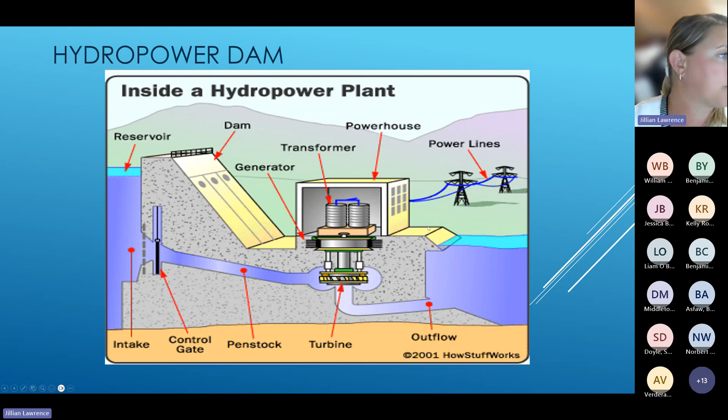I wanted to talk about the two types of means and materials we use in dam construction: the earthen dam, and concrete structures. I wanted to go over some basic terminology.

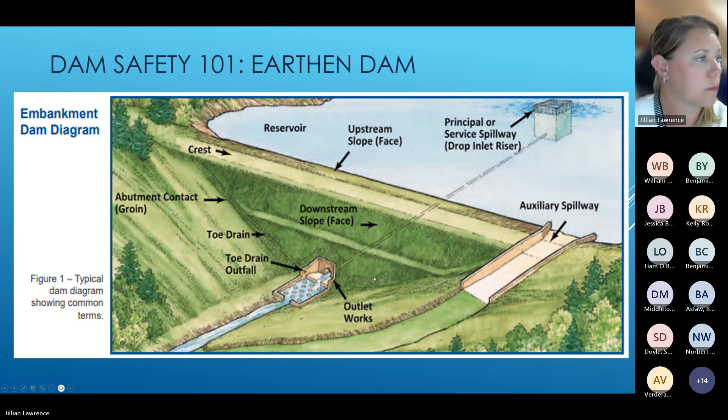The next slide shows us potential deficiencies with this type of construction.

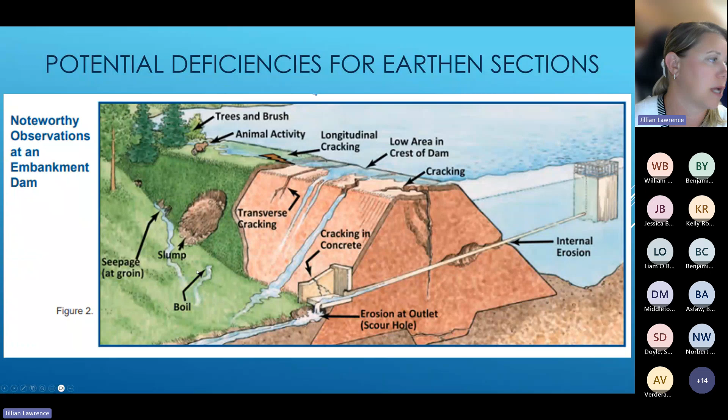For earthen embankments, we're always looking for the compaction and quality of the earthen section, and whether we see any slumping or low points that could be susceptible to overtopping during a flood event. We're looking for cracking, slumping of material, movement of materials, and either an increase or decrease in seepage, or a boil, which would indicate an internal erosion problem bringing materials from the embankment out and exposing them to daylight. Those are a few of the things we look at for an earthen dam.

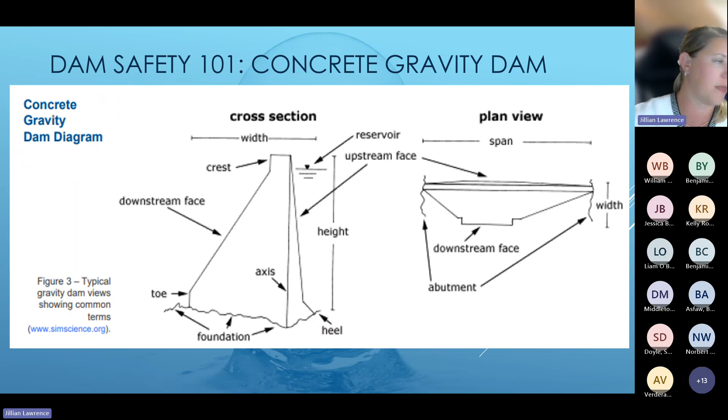For a concrete gravity dam, we have similar terminology with the upstream face and downstream face and crest sections, but a notable difference is that standing on top of the dam, looking downstream, we also introduce the heel and the toe, which is easy to remember if you think about standing on the crest of the dam looking down, in similar nomenclature to the way your foot is facing.

One of the main differences between a concrete gravity structure and an earthen dam is that with the concrete gravity dam, we rely on the weight of the concrete and reinforcement materials to resist the overturning and resistive forces from the head pond. Those are key elements to look for in a concrete gravity dam.

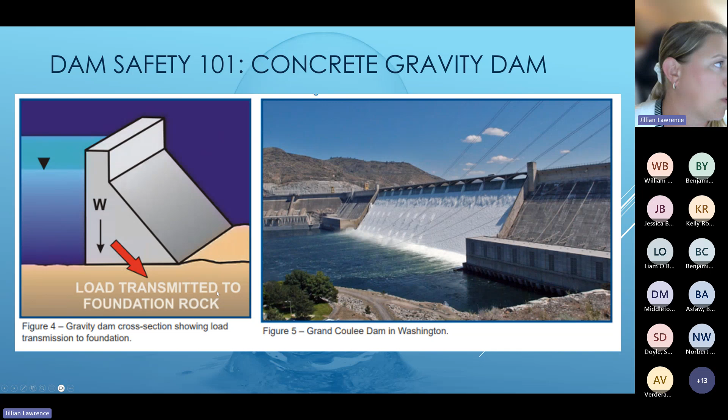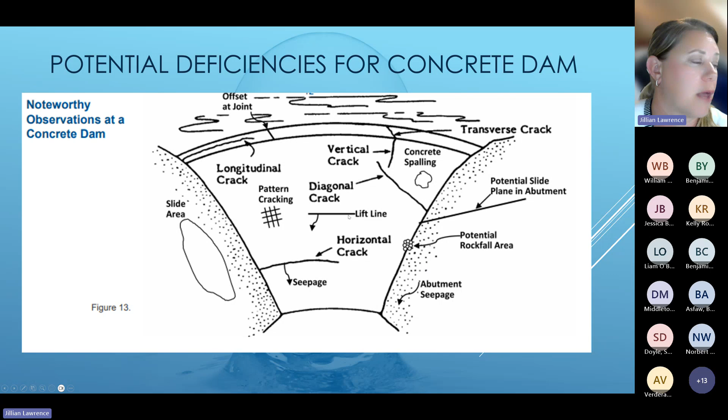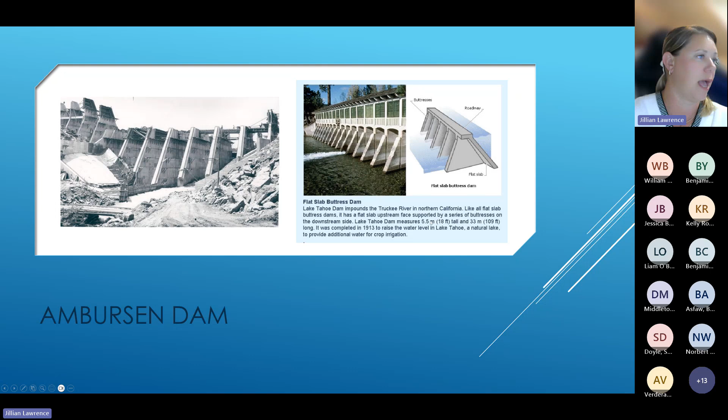Another example of a concrete structure that looks very different in its design and shape is the Ambursen Dam. The concept is very similar to the concrete structure, except it has this buttress and slab construction. This was a popular design because it came out of the need to reduce the amount of concrete. If you recall, we talked about the sheer mass of concrete resisting the water load. This design was able to still resist the water load using much less concrete, but the same mechanism of transferring the water forces to the foundation and the abutments and against the buttresses.

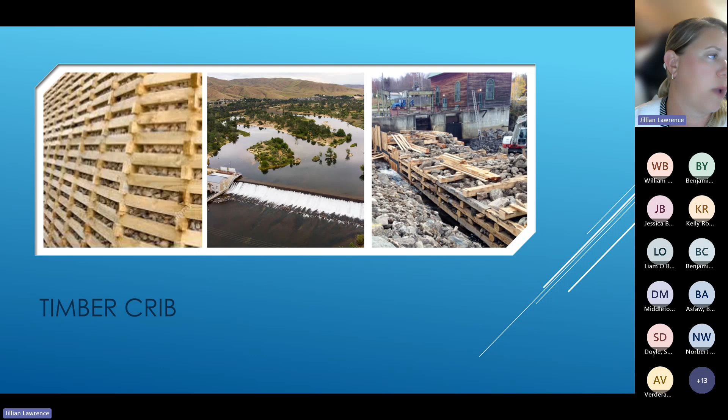I think this is the last dam construction we'll look at. This one is a timber crib structure. The basic design involves putting in wooden timber and filling the void spaces between the cross members with either ballast or rock fill. This picture is of a FERC-regulated dam in Boise, Idaho that was constructed in the early 1900s using this technique, and has since been overlaid with concrete reinforcement.

The reason I wanted to show some of those different construction materials of dams is because when we talk about the way dams fail and the condition of dams, the material and construction are critical pieces. So getting into a little bit of FERC dam safety leads us into the rest of the dam safety programs that we do as a regulated entity.

First and foremost, FERC looks at the hazard classification of a dam. That's an analytical study that hypothetically fails a dam using the worst case scenario, applying the probable maximum precipitation or other precipitation events to the drainage area, then failing the dam in the worst case scenario. Based upon that, we look downstream to see where the flood failure flows go, and we assess what risk it poses to the downstream area.

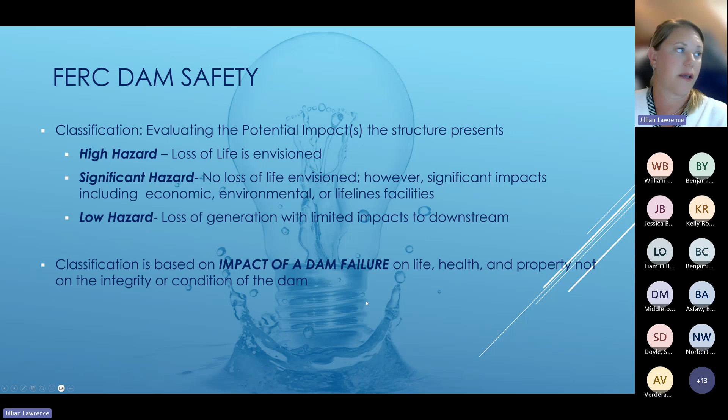So we don't envision the flood flows really leaving the banks or significantly impacting any roadways, any homes, any businesses, those kinds of potential impacts that could occur. The reason that we look at the impact of the failure is because once we know the hazard classification,

it helps guide our dam safety monitoring. As you can see, we have several different types of documents that we prepare for each facility, specific to how we're going to monitor it. For example, the STID, the supporting technical information document, really gives us the history of the structure.

It goes through the potential failure modes that we'll talk more about in the next few slides. It goes through drawings, construction, operation, site geology, stability, and hydrology and hydraulics. So basically it gives us information on the dam as it relates to how it might perform

under a flooding event, under an earthquake event, and general operations. The DSSMP is built out of the failure mode analysis. It tells us how we're going to perform surveillance and monitoring of the structure, what key things we need to look out for, and what things we need to implement instrumentation-wise to monitor for.

The DSSMR is a snapshot of one year. I equate it to kind of your health and wellness checkup visit with your doctor, to see how you're performing. And the potential failure mode analysis is all the ways and vulnerabilities, based on the type of dam that you have and its auxiliary features, that you could fail the dam, or how it could fail or misoperate or perform or become damaged.

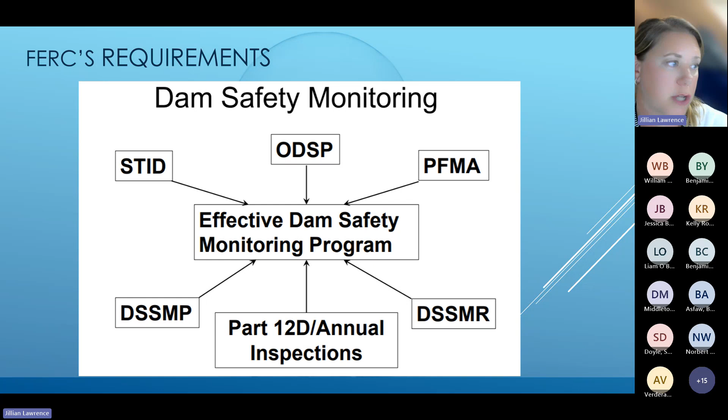So really what this slide is saying is that to have an effective dam safety program, you really need to have all of these elements in conjunction and reflecting upon each other, so that you have a comprehensive program. And so I talked a little bit about the failure modes. We'll go over them in a little bit more depth, but basically dam safety is really about the observation and analytical data that you get on the performance of your dam.

And the way that we go about identifying ways to perform this surveillance is by identifying any known vulnerabilities or potential failure modes. I showed that earlier slide about some of the differences between an earthen structure and a concrete structure, because while there were some similarities, there were some key differences that we look at.

And so when we go to do a potential failure mode analysis, what we're looking at is an initiator. What event needs to occur for failure of the dam? It could be flood related, it could be earthquake related, it could be deterioration or aging of the structure, human error, misoperation, or malfunction. But that alone doesn't cause a dam to fail. What we need is the failure mechanism — how does it progress, and what's the step-by-step progression of it?

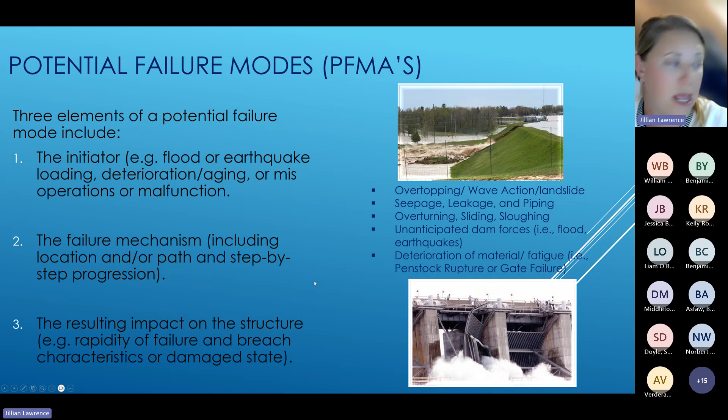So you have a flooding event, you have an earthen dam, the flood rises up to a low point on the crest and it begins to overtop. Now not only do you have the initiator of the flood, but you also have the failure mechanism, in that you have a low point in the crest, the flood raises up and begins to overtop, and then you have erosion of the earthen embankment. And then the resulting impact on the structure is that it progresses without any intervention and ultimately ends up as a failure of the dam.

And so why those failure modes are important: when you build your dam safety monitoring plan, you want to include those failure modes in there in some manner. What you want to do is focus, whether it's your dam safety staff or your hydropower staff or both, their eyes and their visual observation of the structure on the failure modes that are most likely to happen and have the largest consequences, so that they know exactly what to look for.

And so the dam safety monitoring plan really comes out of the failure mode — it's developed off the basis of the failure mode. And then it includes some of the failure modes: how will we know if this failure mode is likely to initiate or start? Well, we can install piezometers if we're concerned about the phreatic surface throughout an embankment and we're worried about seepage at an earthen structure, or weirs if we're seeing a concentrated flow. We want to be able to monitor it so that we quantifiably know whether we're seeing a change in that flow. If we just use visual observation, it's very hard to tell, year after year, day after day, if you're seeing a change.

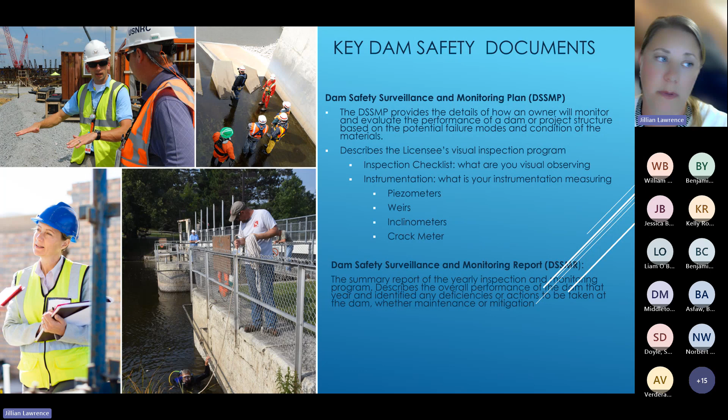It'll also have all of your data from your piezometers, your weirs, and your crack meters if they're installed at your facility. So with those two together, you have your plan of how you're going to observe and inspect your facility, and your report of what's actually happening, so you can look historically back and see how the asset's been performing over the years.

So we talked a little bit about the DSSMP and the DSSMR. We talked a little bit about the supporting technical information document, and the next document is the emergency action plan. You can have your supporting technical document, and your DSSMP and your DSSMR — those are all going to be how you're performing inspection.

But what happens when you have an event? Well, this is where the emergency action plan comes in. What it is, is a prepared document for high and significant hazard dams. It's a requirement for those dams.

You can certainly prepare an emergency action plan for a low hazard dam, even though the consequences of failure are not as significant as a high and significant hazard dam. But why it's important is that this EAP document really identifies...

First and foremost, what the potential failure modes could be at the dam, when to activate an emergency action plan, when you need to notify people that you're having an issue with your structure, and then it follows up with pre-planned actions that need to be followed by your operators and personnel, should you have a dam incident that warrants an EAP activation.

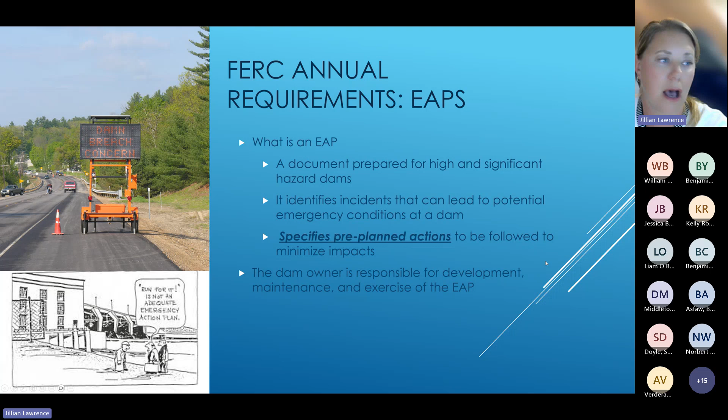The dam owner is the responsible party for the development of the EAP because they know their asset well — they've done all the studies for it. We maintain the EAP, we exercise the EAP, but we have a lot of involvement and review by some of our emergency management agencies and our downstream communities, so that they can best help us implement the emergency action plan should it need to be activated.

So what the emergency action plan is: once an incident has been identified at your structure — for example, you have an earthen embankment, and you've been monitoring seepage for a long period of time in accordance with your DSSMP, that's one of the areas you're surveilling — and you've gone out to the site, and now you're noticing it is no longer just seeping.

It's continuing to seep, but in addition to that, it's turning into a boil, which means the water is bringing material with it. So it looks like chocolate milk. It looks like it's erupting into a small volcano. You can see the interior sediment and soils from the embankment.

And so that change from just monitoring seepage to the actual bringing of material out would warrant an EAP activation. So what you would do is pull out your emergency action plan document, open it up to the notification flow chart, and make telephone calls. What that does is notify all of the stakeholders in your EAP that you are having an issue at your structure, and it puts them on notification.

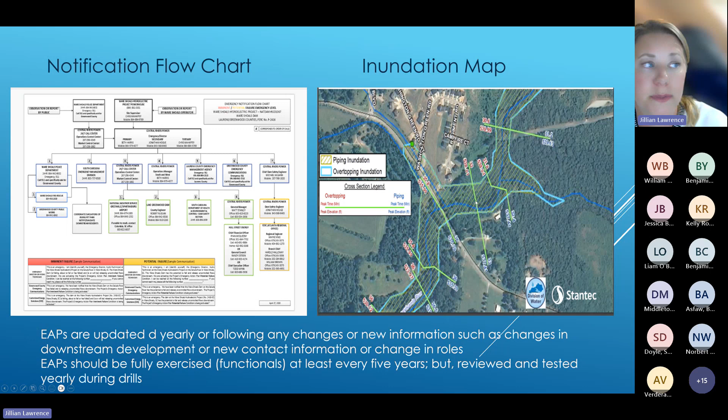Out of the EAP, the notification flow chart and the inundation map are really the key two documents. The notification flow chart tells you who you're going to call and what priority, and the inundation map gives a visual of the areas likely to have flooding impacts, and also gives good information on what those depths are and what the arrival times are. So all key and critical components when you are evacuating downstream.

The last document is the ODSP. This document is not just a site-specific document, not project-specific, but it is the owner's. So the company that can own one or several hydro facilities - it's really their commitment to dam safety, to their dam safety responsibilities, and it's not limited to inspection and operations, but it also means we acknowledge the responsibility of owning a dam. We allocate resources, including personnel and financial resources. It gives a clear designation of responsibility of who would enact EAPs, who's responsible for dam safety at your facility. And then, that you have clear and open communication throughout your organization about your dam safety practices and program.

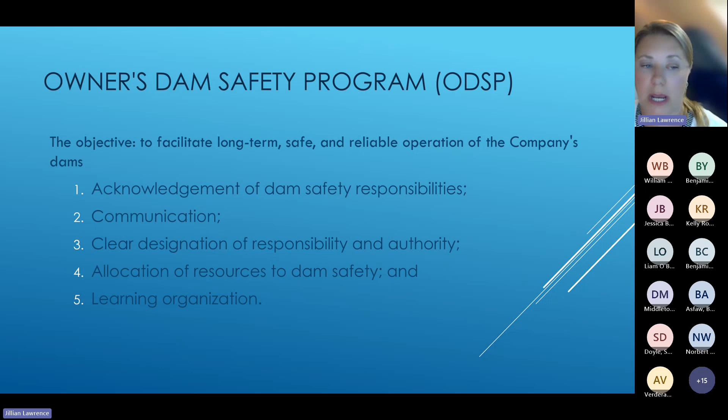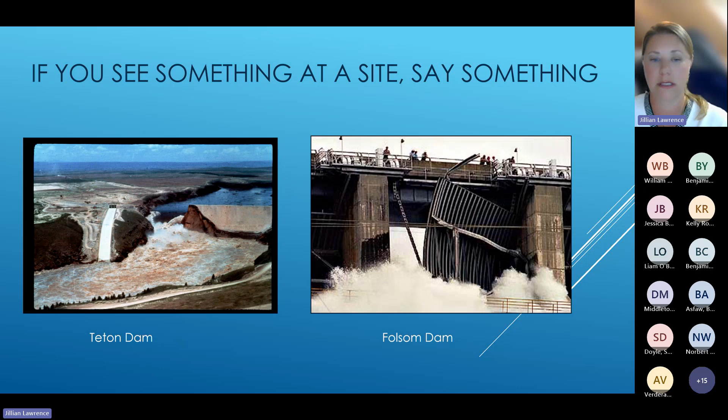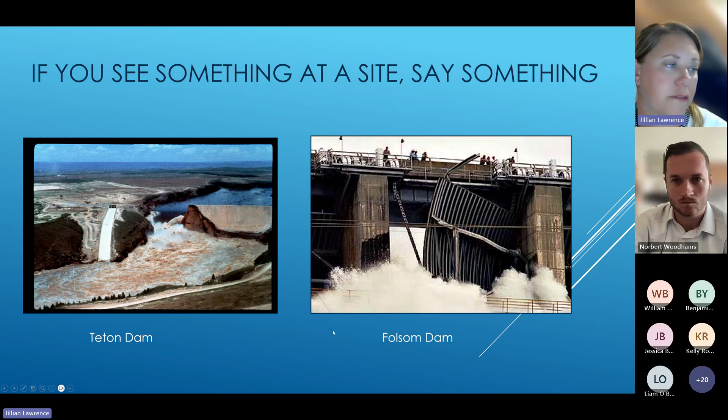And two, that it's a learning environment, because as in all things, we continue to learn. We learn through past failures. We learn through new technologies. We learn from each other. So what I usually say at our facilities is that if you see anything that looks amiss or not right, say something. In dam safety, it's all about visual observation, reading data and instrumentation, and looking for changes - whether you're seeing increases or decreases, any change is warranted to elevate it up to your dam safety team and engineering team, a third party for investigation.

And basically, I think that's it. I have some additional resources if you're interested. This was super quick.

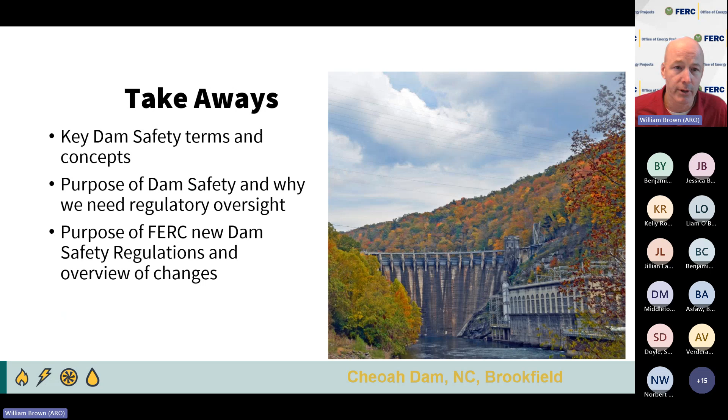All right, so I'm going to talk about dam safety and FERC's programs. I appreciate this opportunity to come and talk to your committee today and share my perspective on dam safety. The takeaways - I'm going to focus on these second two items because Jillian's covered the key dam safety terms and concepts. I'm going to talk about the purpose of dam safety and why we need regulatory oversight, as well as some changes to our regulations.

So we've covered most of the vocabulary in Jillian's presentation, but I'm going to talk about a couple of items here as they apply to our new regulations. We do these independent consultant inspections, called Part 12D inspections. We require them for our licensees every 5 years on high hazard dams or dams that are large - either having large reservoirs or above a certain height.

These independent consultants are experts on dam safety. They come in, look at the project, and then make recommendations to the owner on the safety of the project and things that could be improved. With our new regulations, we've introduced some new terms.

One is called the periodic inspection, and the other is comprehensive assessment. I'll talk about those more later, but I want to familiarize you with the terms. The periodic inspection is just kind of a visual inspection, a smaller effort compared to the comprehensive assessment, which is a lot more work. It includes the PFMA that Jillian mentioned, along with what we're calling a level 2 risk analysis, which puts numbers to those failure modes you identify, estimating the likelihood of it occurring and then joining that with the consequence of the failure.

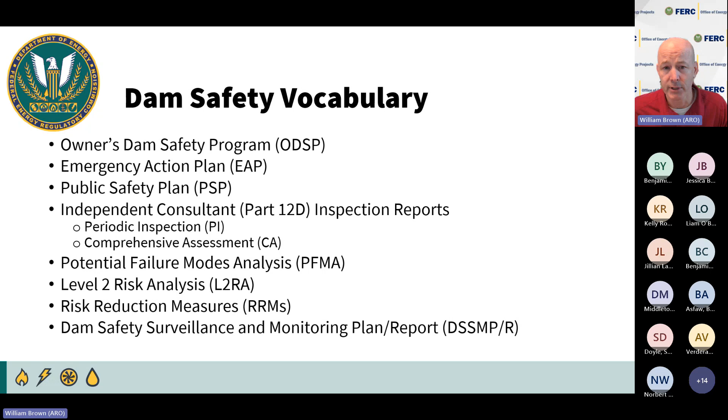Once that analysis is done, we use that information to look at ways we can reduce risk. So common terminology you'll hear is risk reduction measures, and it can refer to a lot of things. It could be like an interim or emergency risk reduction measure, lowering a reservoir or restricting it, changing the way we operate it, maybe improving the EAP, making special provisions so we're ready to activate it more quickly and all the EMAs are on standby. Or it could also mean improving the monitoring, like Jillian was talking about, so that if there's a certain flood or loading condition we're concerned with, we're looking at the dam more closely when the reservoir's at that elevation.

Already covered hazard classification. So from a general standpoint, it's really easy to understand what dam safety is. We know how much energy is stored behind our dams, and if that all gets released at once, it can be devastating downstream. So that public safety aspect is easy to understand.

But once we get into implementation, things get really complicated, and I think you could tell that from Jillian's presentation. It involves a lot because there are so many possible things that could go wrong. And even though these dams have been in operation safely for years, decades, maybe even 100 years, we have incidents where things unexpectedly pop up and there's a problem we were never aware of in the life of the project, and suddenly people's lives are at risk. So it can be challenging and complex at times. That's something to think about.

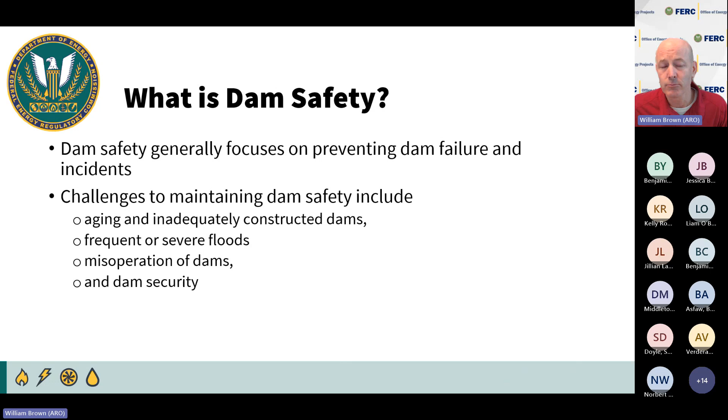A lot of times what we have is a combination of events we've never seen before that create the incident or failure.

So who's responsible? I think Jillian kind of covered this already, as far as the dam owner having principal responsibility, but they're not alone. They get recommendations from independent consultants or other consultants they may bring in. And then FERC has an oversight role, and we also conduct our own inspections and provide oversight of dam safety, public safety, and security at the projects we regulate.

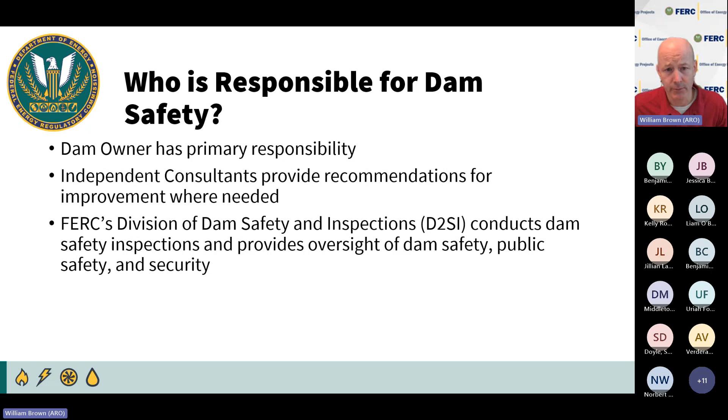So the question of why do we need regulatory oversight? We can go back to the 70s. Prior to the 70s, there was very little regulatory oversight of dam safety in this country, with the exception of California. In the 20s, St. Francis Dam failed, killing over 400 people, and they had already created their own dam safety program. But the rest of the country largely did not have that until the 70s, when three major failures occurred.

The first one, in 1972 at Buffalo Creek, within minutes, over 125 people were killed when that dam failed. The second, Jillian showed a picture of Teton Dam - it was a Bureau of Reclamation dam, nearly 400 feet tall, failed on first filling, and 11 people lost their lives and over $1 billion in damage. Then the other incident, in 1977, Kelly Barnes Dam in Georgia failed, killing 39 students, most of them college kids.

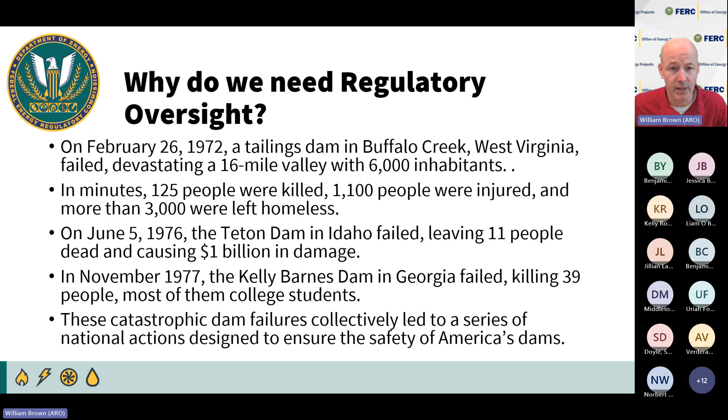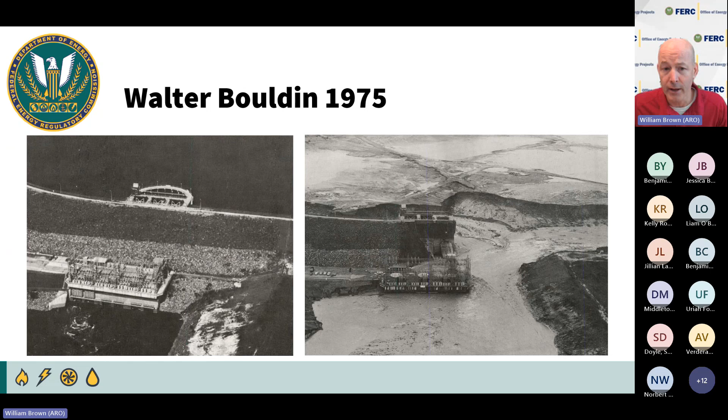If you're familiar with Walter Bouldin, you don't hear about it a lot as a dam failure. Fortunately, no one died in this, but the project was in operation, I think 6 or 8 years, and then suddenly the left embankment here failed overnight rather quickly, and it was a pretty devastating failure. No one died, but the losses to Southern Company, Alabama Power, were tremendous - $100 million in lost generation and cost of reconstruction, which would be close to $2 billion in 2023 dollars. So that project was remediated and is in operation today.

I mention it because even though there was this momentum in the dam safety community and FERC was part of that, this incident, this failure, is really what shaped the way our regulations were formed or changed 40 years ago. So in large part, our regulations were updated after this incident, and then they essentially didn't change for 40 years.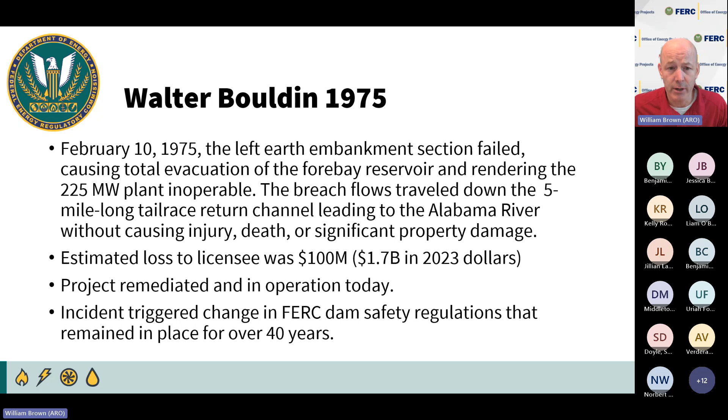What happened was during passage of normal flood flows, one of the slabs on this chute failed and ejected. This spillway is enormous, the water's flowing over 100 miles an hour, so there was great concern over the failure of that slab.

This scour was moving quickly up towards the base of the dam, and they had such great concern that they were going to lose this dam that they activated the EAP that Jillian talked about earlier. Being that this is the tallest dam in the U.S. in a populated region, the inundation zone has over 200,000 people in it, so they evacuated approximately 200,000 people. They didn't lose this dam. They reopened the gates and salvaged it.

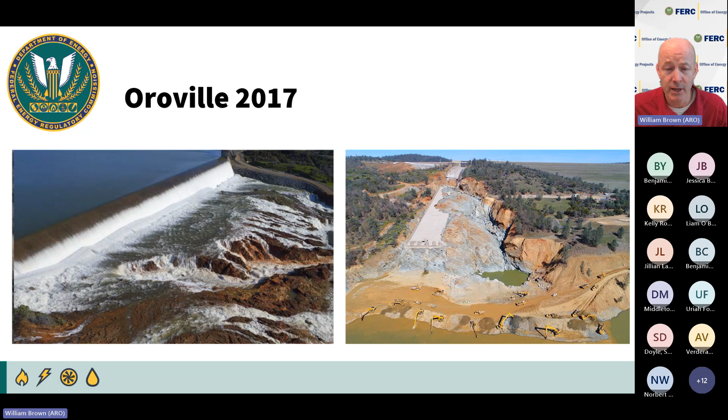There were 3 different audits done afterwards. One was the independent forensic team, another one was done by FERC, and a third one was done by DOE.

The independent forensic team findings included these items: first, that our existing programs weren't adequate for identifying and preventing some dam safety incidents like Oroville, and that we needed new processes including a comprehensive review of original design and construction with a comparison to current state of practice. We also needed risk assessments to evaluate complex systems and low probability events.

These things were already being done by the Corps and the Bureau of Reclamation. So these activities we're doing to evaluate the safety of dams bring us to a level that's consistent with the Corps and the Bureau.

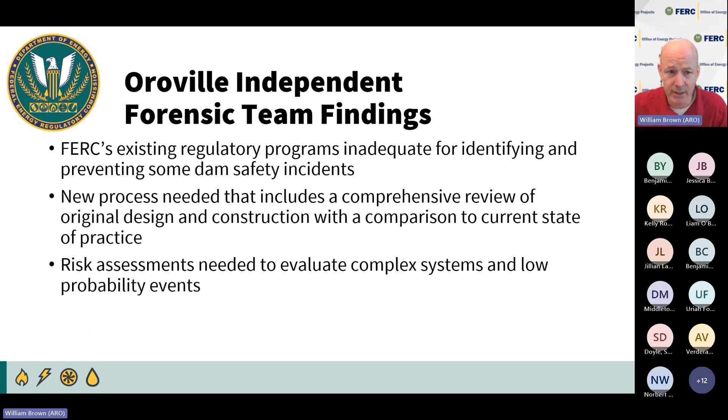I know there is a large cost associated with it, but the cost of one Oroville, I'm not sure what the total is, I think it's multiple billions of dollars. So if we can avoid those through these efforts and protect the downstream public, that's really the goal of these things. Our new regulations went into effect in April of 2022.

These rules require alternating Part 12D inspections, alternating between comprehensive assessments and PIs, performed by multidisciplinary teams. Those experts would include civil engineer experts in soils, structures, and hydrology and hydraulics, and often a geologist. If there are a lot of spillway gates at the project, you might also see mechanical engineers involved.

We're currently implementing the first round of these, and we're learning a lot as we go. But so far, I've seen the process be beneficial, with positive feedback from licensees in most cases.

The other things our regulations changed: it basically codified the ODSP requirements that Jillian talked about earlier, and also now includes an external audit every 5 years, plus revised reporting procedures on public safety incidents.

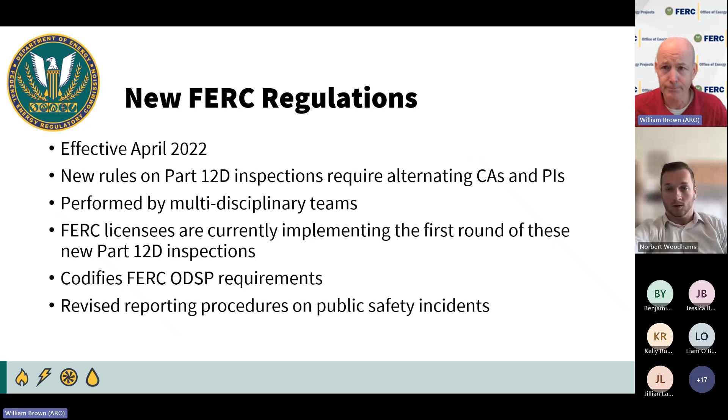That's actually the end of my slides. But one thing I would point out that we didn't talk about a whole lot is public safety. FERC has been fortunate. There have been some major incidents and failures, but to date we haven't lost any lives from a dam failure incident. But we have lost a lot of lives due to public safety incidents.

Water in general is dangerous already. People get in there with boats, consume alcohol, have a good time, and things happen. Then when we put a hydropower project in there and we're changing releases, the flow regime changes downstream, it can trigger some dangerous conditions for fishermen, kayakers, all of the recreation that will be attracted to that project.

So public safety plans and efforts to identify changes in recreation, so that those plans can be updated, are important, because we do see a lot of tragedy around these projects.

Yeah, it's a very vital part of it.